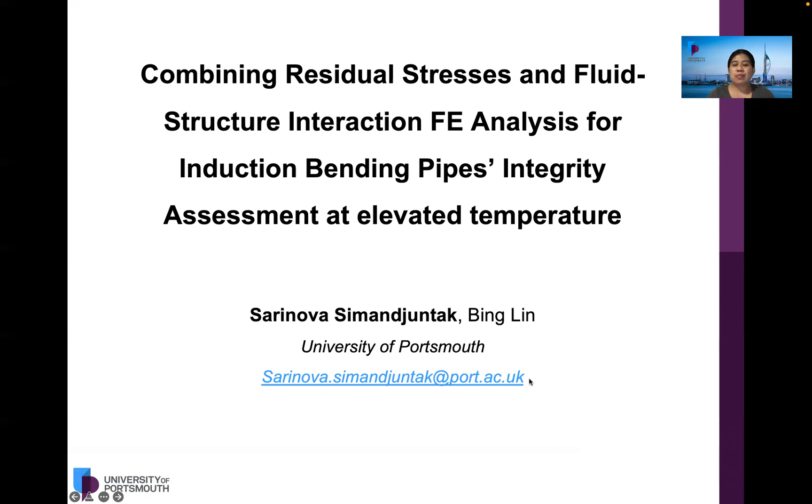I will follow this outline of presentation, starting with our motivations for conducting this work. We are looking for an effective methodology, more towards a modeling approach, that can correctly capture the stress distribution in the pipe, enabling us to predict or assess the life of structural components more accurately.

We have created a series of finite element models to simulate the pipe geometries, the bending, residual stresses, and fluid structure interaction in the pipe. All are using Abaqus software.

To verify our finite element models, we use published data, for example data published by Kajespur and Yetisir, who conducted experimentation and finite element modeling of a cold bending process of a pipe to determine stress or residual stress distribution along the bend pipe.

We will also analyze the influence of pipe bending on the von Mises stress distribution, particularly at the elbow areas, at the intrados and extrados locations, where sometimes we see big variations in the geometry, such as thickness, thus affecting the stress levels in those areas.

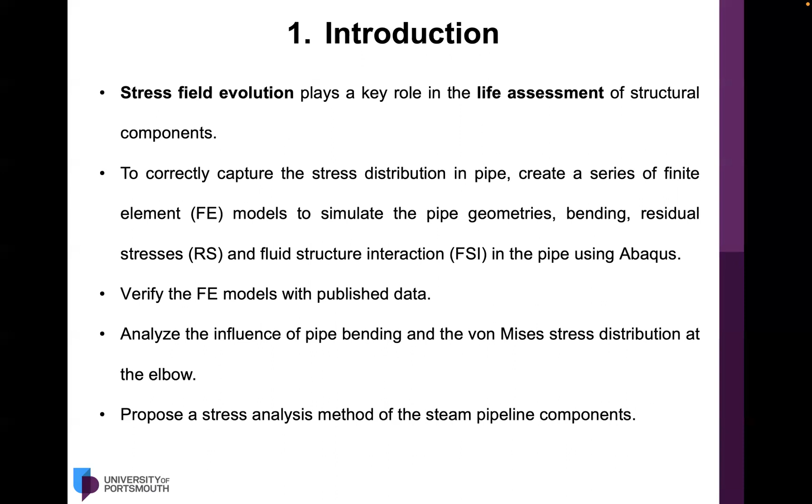We will start our work by developing a bend pipe model, then run simulations of the residual stress only model, followed by a different simulation with no connection here, a fluid structure interaction model using CFD methods. From each of these steps, we will generate stress and temperature fields results, which subsequently become our initial conditions for the final simulations.

The final simulation will implement residual stress combined with fluid structure interaction models to simulate at elevated temperature, around 323 degrees Celsius.

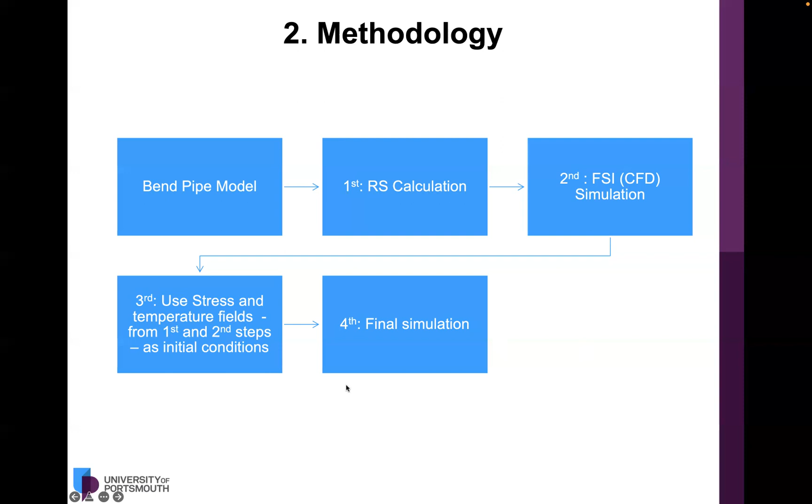For the pipe materials, we are referring to A106 grade C, seamless steel pipe materials, which is a good material for high temperature application.

For our model, we are referring to the ASME standard material stress and strain curve for the A106 grade C.

But for validation purposes, we are taking the stress and strain curve profile from the Kajespur and Yetisir published data. This one in particular was obtained from the area or location denoted as U575. So this is not a material, it's just a denotation for a location along the bend pipe reported in the Kajespur and Yetisir publications.

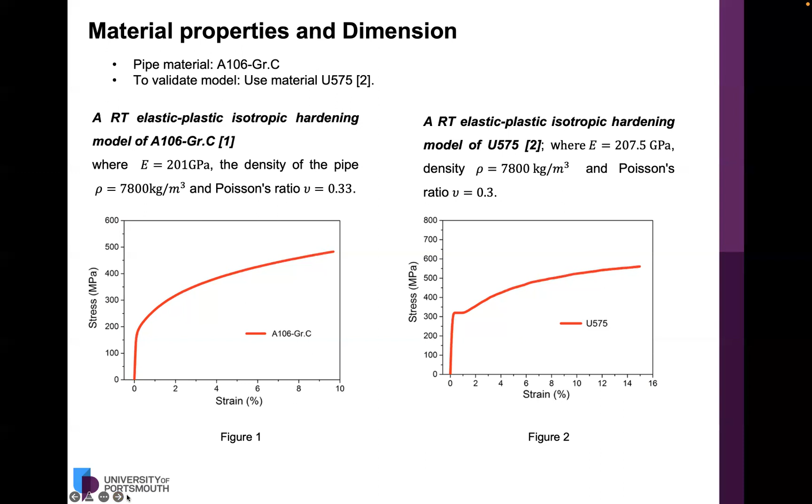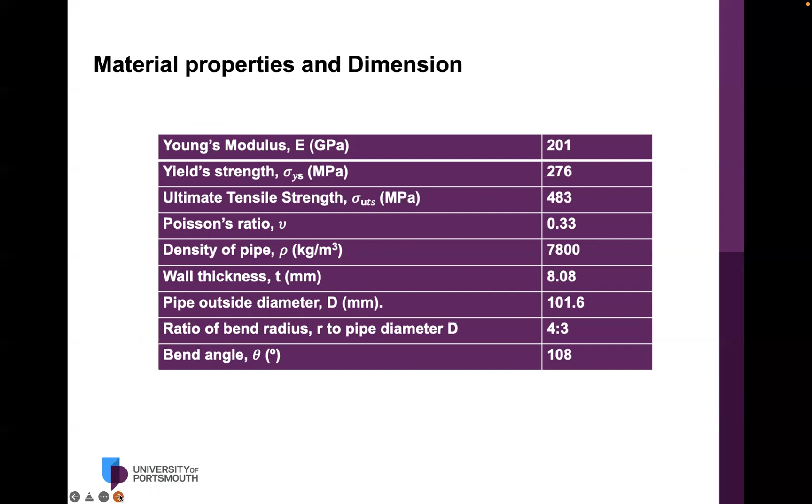We are also referring to the temperature-dependent material properties of the A106 grade C, such as the elastic modulus, yield stress, conductivity, specific heat, and thermal expansion. They are all as a function of temperature.

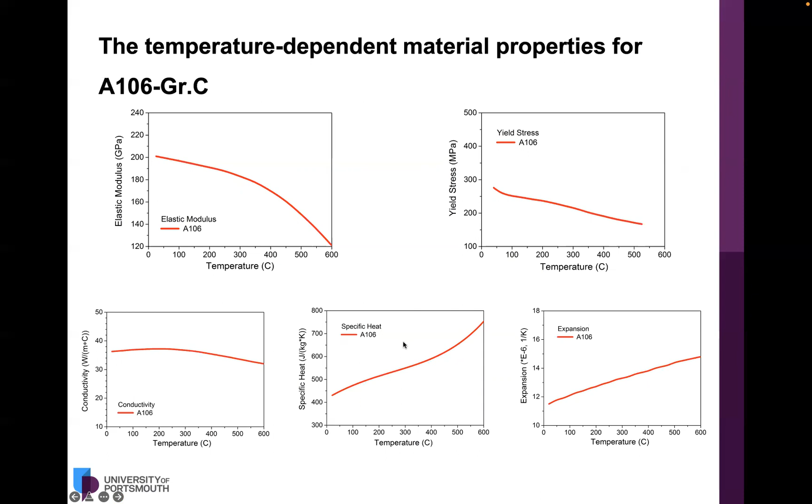The first step of our work is to perform pipe bending modeling, where the cold bending process of a pipe was modeled using Abaqus Explicit version 6.14-1. We introduced some parameters and contact conditions, such as the contact between pipe and clamp, pressure die, and roll, with friction coefficients of 8, 0.1, and 0.4 respectively.

We use C3D8 continuum elements and R3D4 rigid elements of Abaqus to model the pipe and the clamping beam respectively. Meanwhile, the R3D4 elements were also used in the modeling of the clamp die and pressure die.

We conducted a mesh convergence analysis where we found good convergence for the pipe at a maximum element size of 0.06 millimeter.

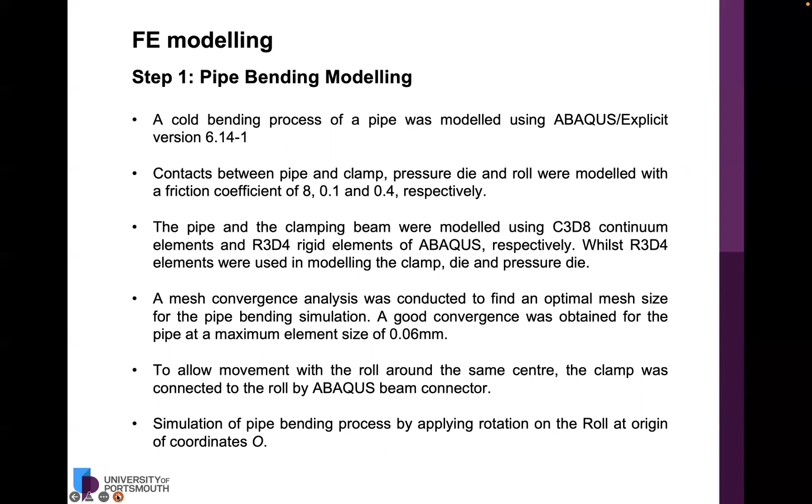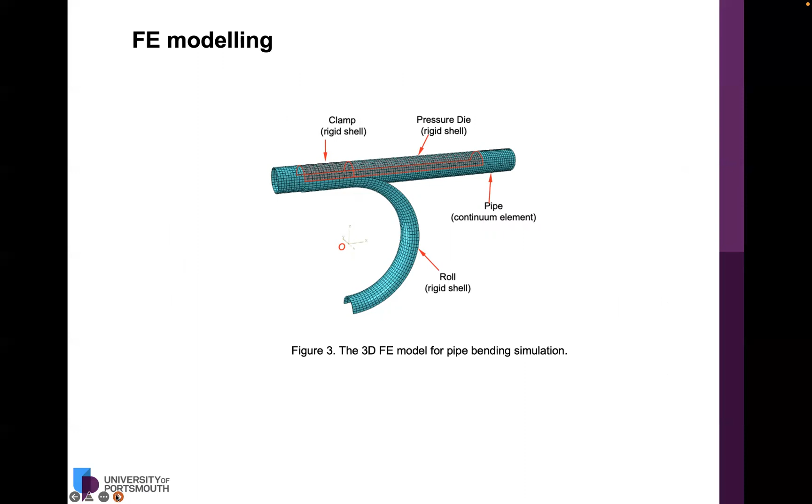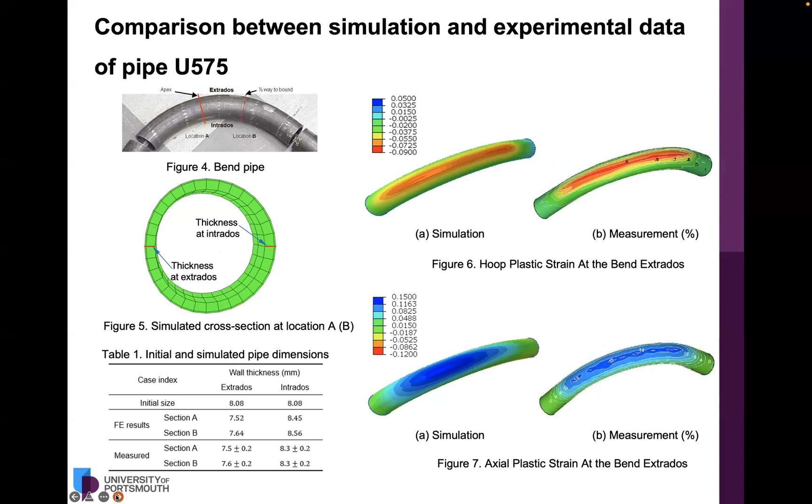Once we've done the model, we run the simulations, and our results from the simulations were compared with the measurements from the experimentations done by Kajespur and Yetisir. In short, we found that they are pretty much in agreement, so the simulation and measurement results are in agreement. This gives us confidence to move to the next stage.

Which is the fluid structure interaction modeling. For this, we are using the model shown in figure 8.

First of all, we will remove all the contact pairs from the pipe. And we applied some viscous pressure parameters on the pipe to reach a quasi-static equilibrium quickly.

We can introduce, or we use, Abaqus explicit setting option to import the coefficient of viscous pressure Cn into a viscous pressure loading. But we would like to make sure that Cn is kept to a small value to minimize ongoing dynamic effects.

For the thermomechanical analysis, we can refer to this figure 8b on the constraint that was introduced.

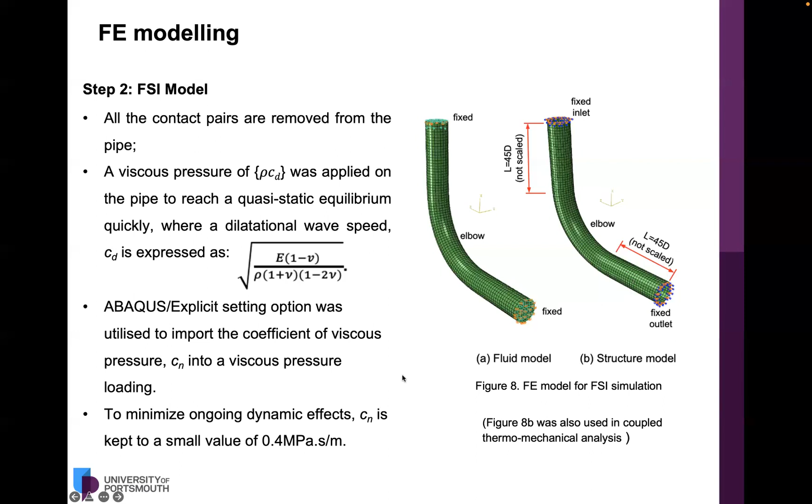So we are looking at the distance at length equals to 45 times diameter. And this is to eliminate the elbow effects on fluid velocity profile.

We also introduced a film coefficient and sink temperature at the internal and external surface of the pipe during the heat transfer analysis. We make the assumption that the fluid is incompressible and Newtonian, as well as has no slip or no penetration conditions on the wall.

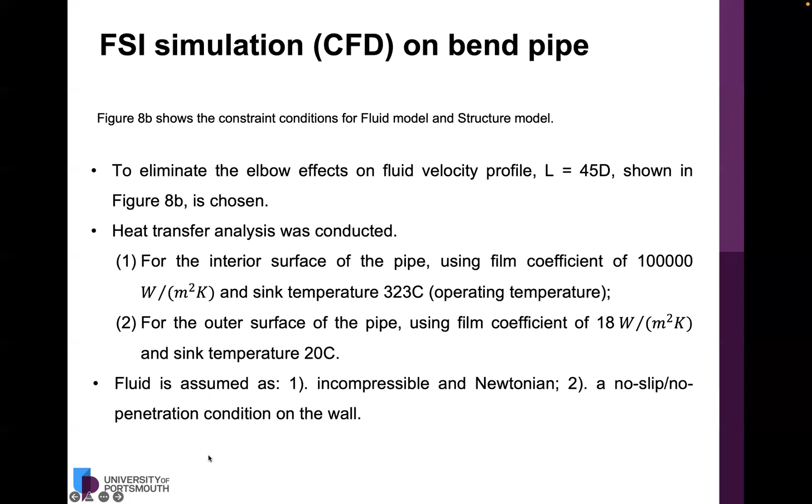So we run the FSI simulations and the results are verified again using the published data. This time it is reference 3. The details of these references are in the final slides of this presentation.

So what we are trying to show here are the profile of velocity against locations, and the locations are along this diameter of the cross-section of the pipe.

And this is referred to the distance with regards to the diameter. So this is 1 times diameter, 10 times diameter, 40 times diameter distance from the elbow.

Again, it shows that our fluid model is more or less in agreement with the reference data published in the journal.

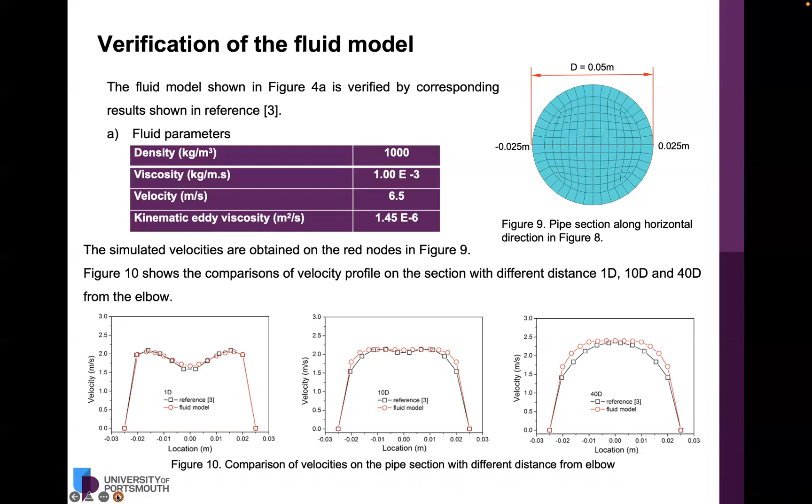So using the stress fields and the temperature fields, and using them for our initial conditions in the finite element model, the thermomechanical finite element models, which can be applied through user subroutine DLOAD.

And also we activated the Abaqus power law creep model during the analysis using these parameters, again, to allow us comparing for like with like. So these are the parameters for the materials and the conditions that we are simulating.

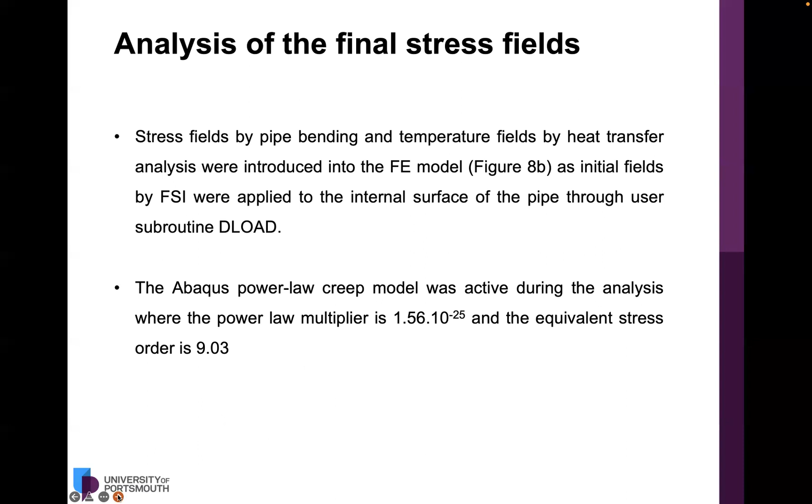And all these are considered or used in the final simulations using the combined residual stress and FSI model. We have the results of stress distributions along the bend pipe at room temperature as well as at elevated temperature.

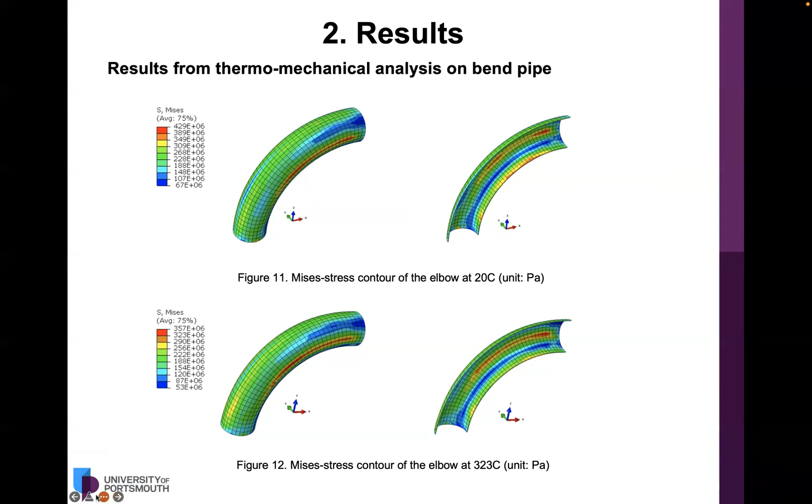The elevated temperature models show a reduction in the stress levels for both cases.

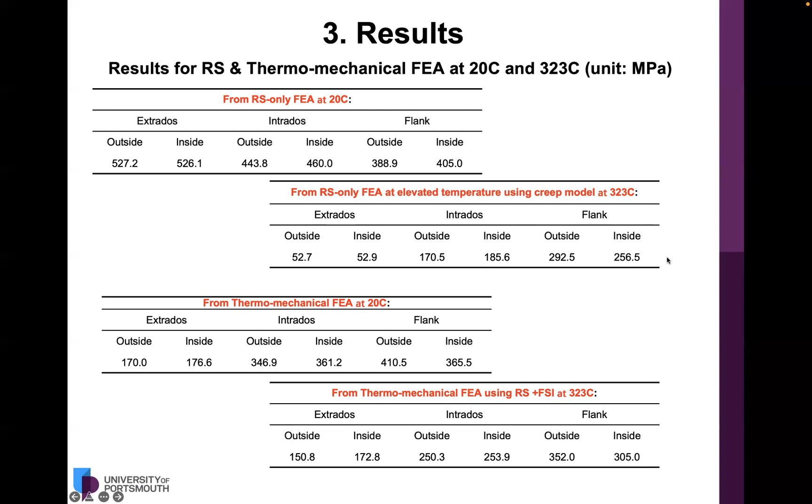And it seems that the creep model applied to the residual stress only finite element analysis reduces quite a lot of stress levels, and this is thought to be a result of stress relaxation.

We can also obtain the equivalent plastic strains, which is very useful for either fatigue or creep life assessment.

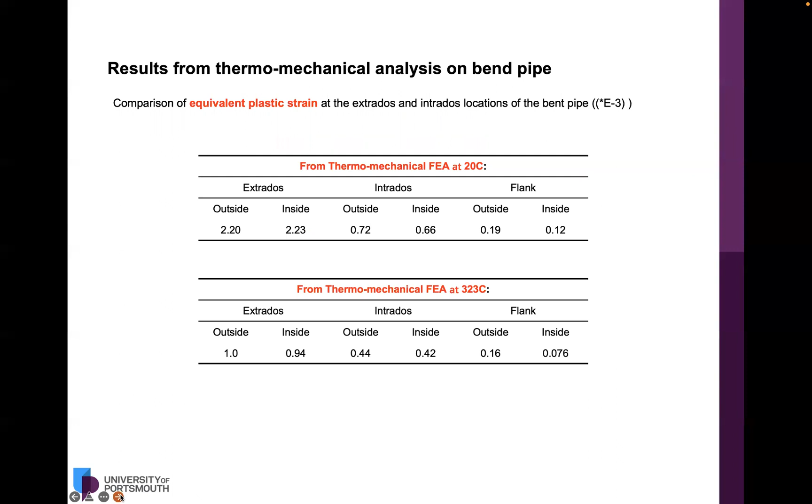So in conclusion, the finite element models that we are proposing can simulate the pipe bending and fluid structure interaction at the pipe elbow. And we can, at the moment, verify these models with the published data.

Of course, we are planning to validate our models with experimental test data, our own experimental test data, in the near future.

From the high temperature combined residual stress and fluid structure interaction simulation, as you can see from previous slides, von Mises stresses and equivalent plastic strain on the bend pipe relevant locations are reduced in comparison to the stresses and strains obtained from the residual stress only model.

And the power law creep model for elevated temperature pipe bending simulation resulted in much reduced stress values.